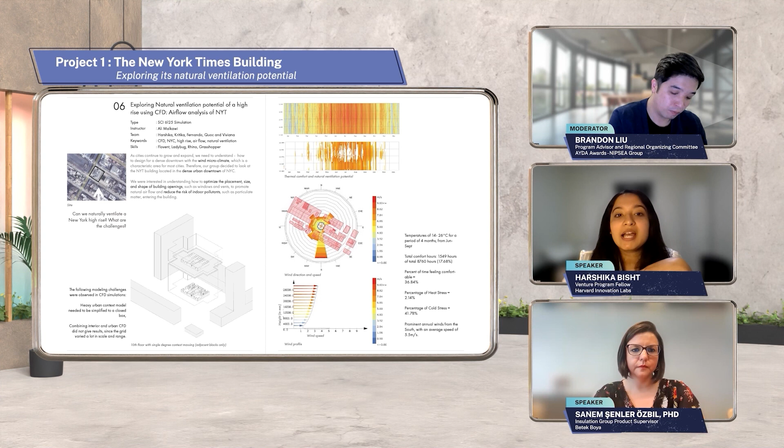Out of that analysis, we were able to iterate on a few options and test them. What you're seeing on screen is a graph that gives you an idea—all the blue places are cooler because they might have buildings or some obstruction blocking the wind. The reddish zones aren't hotter in general, but have more wind flowing through them. So you have a spectrum from blue to red showing the wind flow.

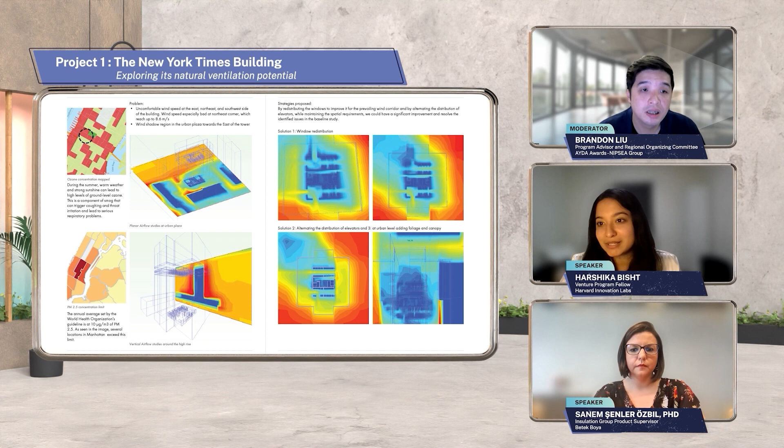In this case, we were able to redistribute our windows and some of our elevator shafts to enable better airflow inside that floor plate. These are some key analyses you can do using this kind of workflow. You could utilize these tools, or there are more tools out there—you can research online and see what fits best based on your previous knowledge.

This is another project I did where we're looking at a facade. I think one good thing about undergraduate studies is you get to innovate so much—you can create very interesting facades if you want to. And I'm sure in AYDA you've had some amazing projects with students. I wanted to focus on tensile facades particularly.

I was looking at this kind of innovative, all-encompassing fins that I could apply. This project was in Delhi during my undergraduate period, but then as a graduate working in climate-responsive design, I thought I might as well go back and analyze how consciously I designed—how my building performs. That's where I gave a second life to this project.

The tools used here are Climate Consultant and Climabox for this project. There's some Ladybug being used also on the side, and Climate Studio, but largely it's simple tools that give quick results. This is one of the psychrometric charts, which can get a little complex to understand—I know that.

Climate Consultant directly tells me the best strategies to move with, and that's what I required at that time. Since it's in Delhi, I clearly understand there are hotter days, so you need more cooling strategies there rather than heating strategies.

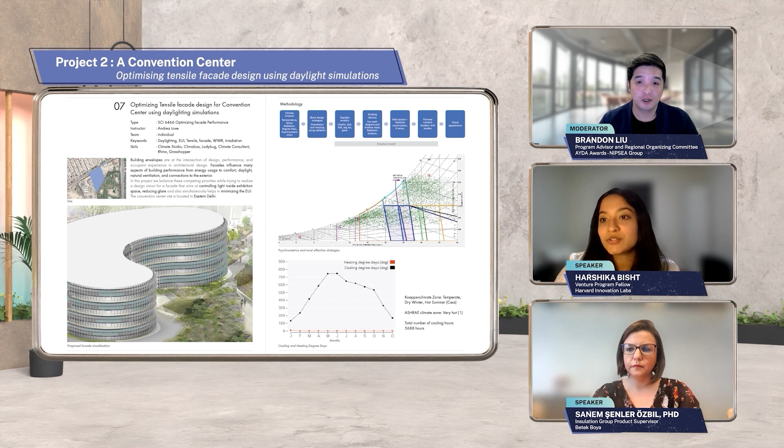That was the whole idea - I picked one block and tried to analyze it in different positions to see if I could reduce the use of material in my building. Even simply by orienting it differently, if there are shadows falling from nearby blocks, can I remove the need for facade details that block sunlight entirely? So this was one way of thinking consciously about reducing materials.

I was also trying to understand how much radiation is falling on the block, to understand how much sunlight is actually passing through. Earlier, as an undergrad, not knowing the best way to design, I had put in full glass windows and then put a tensile facade on it. But here I had the opportunity to redesign.

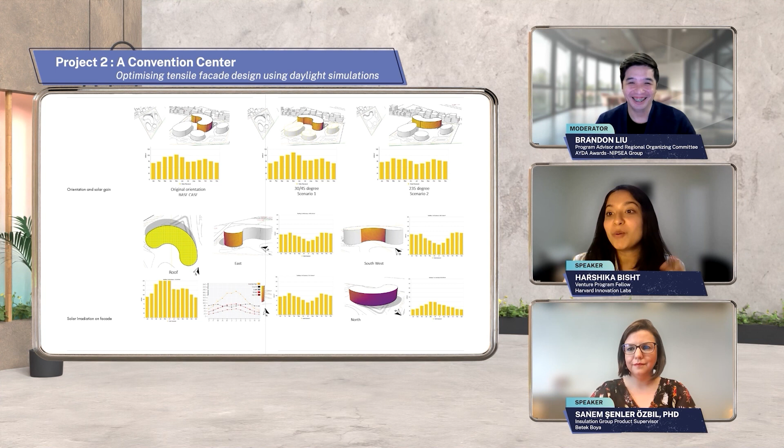So I reanalyzed what the wall-window ratio should be. Especially in our climate in Delhi, should I go for 55%, 60%, or 40%? I analyzed these different wall-window ratios to see what performs best on the basis of lighting, because one key issue here is that this is an exhibition hall - it needs to maintain natural light throughout, and it needs to be designed so the exhibit halls remain well lit, but also avoid glare.

So this is another climate studio analysis I'd done. As you can see, when you move from 60% to 40%, the green area reduces - that's the spatial daylight autonomy throughout the year.

That's a technical term, we'll give you some definition of it on the side. But it basically gives you an idea of how much sunlight there is throughout the year. As you can see, when the green reduces, that means the innermost region in the room doesn't have light throughout the year, in short.

We can still see on the yellow areas, this is the glare. So we reduced the glare at 40%, but we also lost some of the light. It's always a balance between the decisions you're making. You cannot go completely on one side where you're doing climate responsive design but not taking care of the occupants inside.

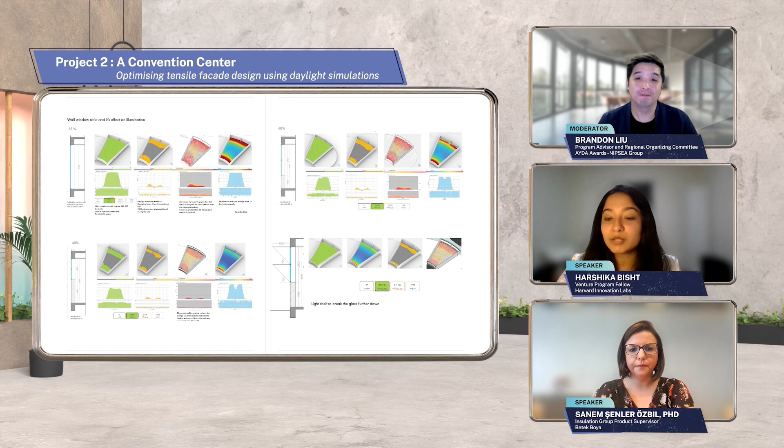And then we started looking at vertical systems versus all-encompassing systems. Now it's starting to look deeper into design. These were the two main designs I had for the tensile facade.

So I was thinking about doing vertical fins, or doing these full-on diamond-shaped tensile facades, which actually have some separation in between them so they can let the light in - more indirect light, which is obviously better for the people.

And then we do smaller analysis in terms of what it looks like inside - how much light do we have inside the room? If there's going to be really glary light at the bottom, like you can see in the pinkish zones, through the window you can see you're getting a lot of light in.

So again, between the two, we could see we're reducing glare more with the vertical fins - we're not reducing as much glare here. So that's why I went forward with the vertical fins.

Throughout the process, as you can see, you're making decisions based on the different alternatives you have. You're iterating on them, changing sizes and dimensions, and this is all like a designer's work - you can reduce consumption a lot by just designing consciously here.

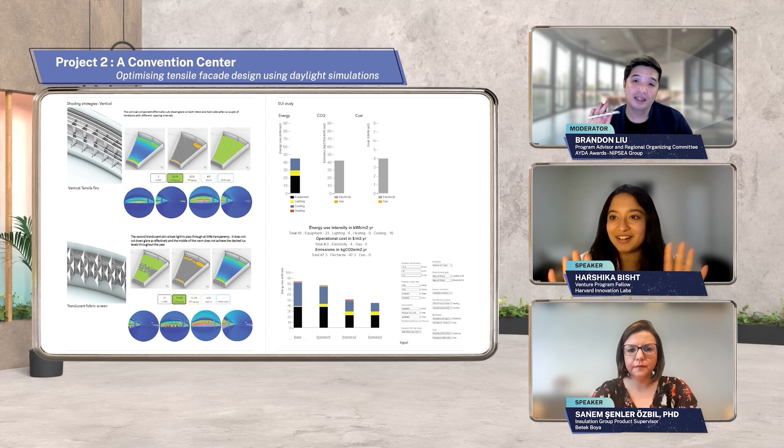I've done some analysis on the energy use intensity later on, but I think just to be wary of the time, I'm going to stop it here.

No, I think it's great. No, a few things I've caught. Maybe Sanem can add on as well.

So what I really like is you mentioned from a surface level all the way to in-depth, and then we can choose the kind of tools that's suitable for us at that point, whether we're a student or practicing. I think what you do reflects on the importance of what Sanem does too. If Harshika were to know more about what Sanem works on as an undergraduate, the outcome would be different, and at the graduate level it becomes even more exciting. This is how I see it as an observer.

Another thing I really like is the word you used, Harshika - consciousness. You're conscious that you want to bring a solution, and that's why it led to so many simulations, hypotheses and trials and errors, on how a slight change in the diamond-shaped tensils, or a full vertical surface, or the ratio of windows and walls. If more designers, even at undergraduate level, can start playing with these things, the outcome would be everyone reducing 1%, and that is great. Oh my God, I'm so excited.

Another word that came to me when I look at your work is that there's a spectrum - how we balance between climate and comfort. I think what you share gives me a very clear perspective of your work and how it can impact how designers work. And I could be wrong, but I think a lot of what you do is also about the relationship of the building with the environment.

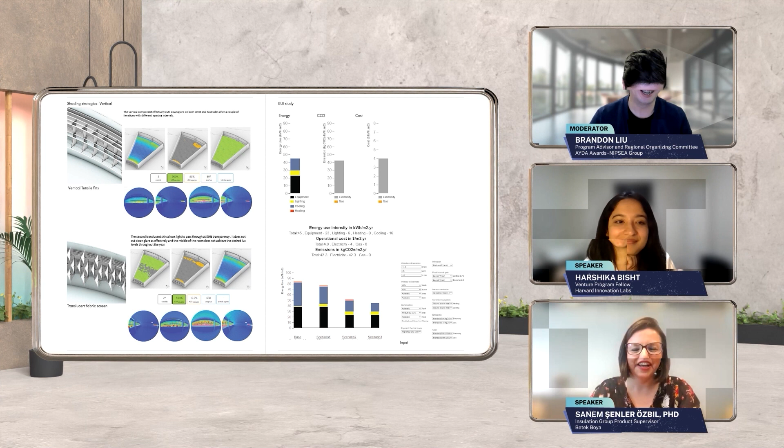Okay, let me first start with a brief introduction of my company, Betek. Betek was established in 1988 to work in the field of construction chemicals. Right now, Betek is the pioneer company in paints and ETICS sector in Turkey, with all these brands you see on the screen. We're actually in many business segments - we have many products in architectural coatings, both for home solutions and professional solutions, products for industrial coatings, products for wood coatings. We're a full producer of ETICS, and we also have auxiliary products classified as beyond coatings.

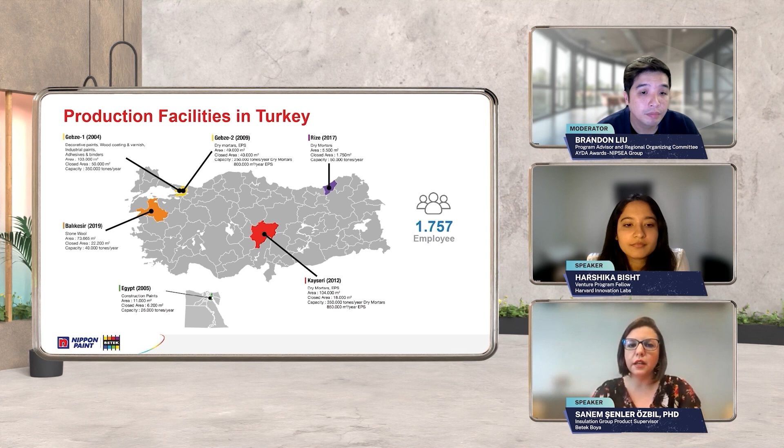We have 6 company production facilities in Turkey. We have Gebze 1 facility, where we produce mostly paint products. In Gebze 2 facility, we produce dry mortars and EPS, which is an insulation facility. We have a similar facility in Kayseri, producing again dry mortars and EPS. We're producing dry mortars in Rize, and our stone wool production is located in the city of Balıkesir. We also have a construction paint production in Egypt.

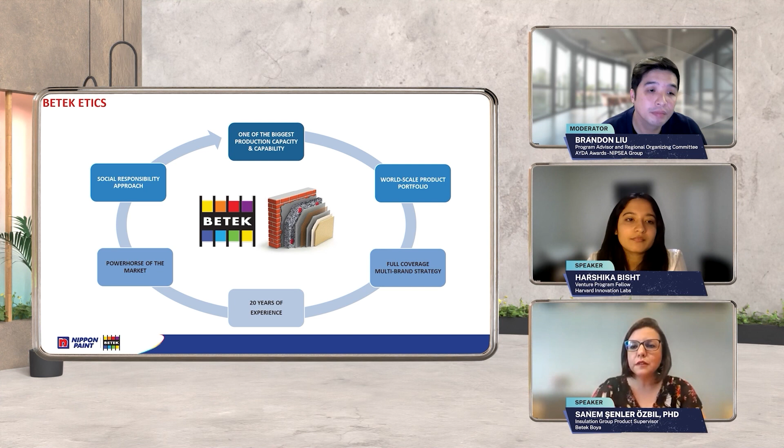In terms of ETICS, Betek has one of the biggest production capacity and capability. From this picture, you can see that ETICS consists of many products directly applied on top of each other, and we are producing most of these products. We have a world-scale product portfolio, full coverage multi-brand strategy, more than 20 years of experience for ETICS. We are the power horse of the market, and we take ETICS as a social responsibility. What does this approach result in? Those numbers. We take thermal insulation as a social responsibility, and we calculate all these numbers yearly and publish these results.

By the year 2023, in 20 years, with net sales of more than 235 million square meters, we could provide a comfortable life to 9.5 million people. As a result of energy savings, natural gas costing 65 billion Turkish liras is also saved. And from the environmental point of view, 28 million tons of carbon dioxide equivalent greenhouse gas emissions are prevented. This is equal to 21 times the annual carbon dioxide absorption of Bolu forest, one of the biggest forests in Turkey.

Energy and climate, let's start with these issues. As you know, the main actions and everything actually started with the Paris Climate Agreement. 195 countries agreed that we have to do something, since it's becoming late. After signing the agreement in 2016, the European Commission published many targets. The main target is to achieve a carbon neutral Europe by the year 2050.

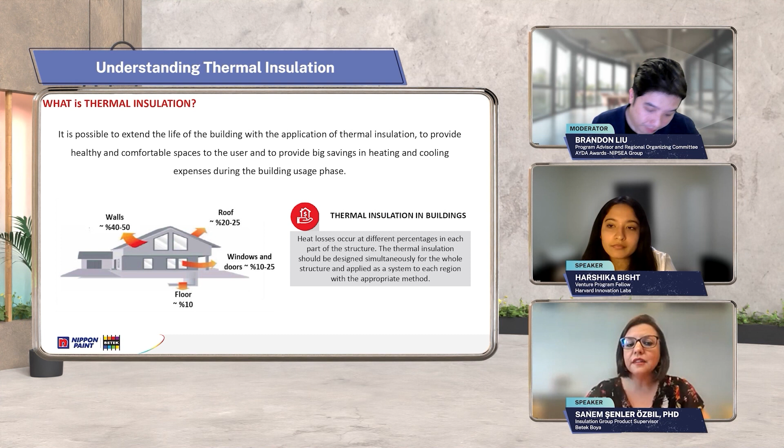So what is thermal insulation? Thermal insulation is an application applied outside of your building to prevent heat losses. You can see from this picture that heat losses occur at different percentages in each part of the structure. A building's facade is normally the largest surface area between its internal and external environment, where a great number of heat losses can occur. Thermal insulation of the external walls from the outside is an efficient way of protecting against thermal energy loss, and it provides healthy and comfortable spaces to the users.

First, we have an adhesive to glue the whole system to the facade. Then we have the thermal insulation board, either EPS or stone wool. We have anchors applied, and then the base coat is applied with a glass fiber mesh embedded inside it. Finally, the ETICS system is finished with the finishing coat. Exterior paint is not included in the ETICS system.

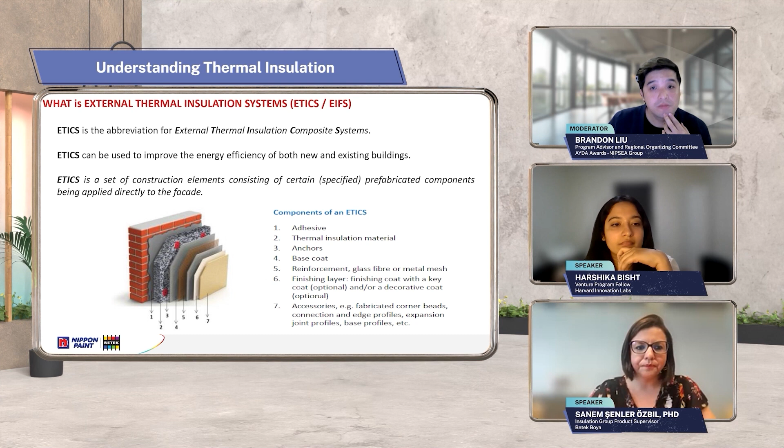The quality and durability of ETICS depend on the careful choice of the system components, and it is also important to choose system holders with their certification.

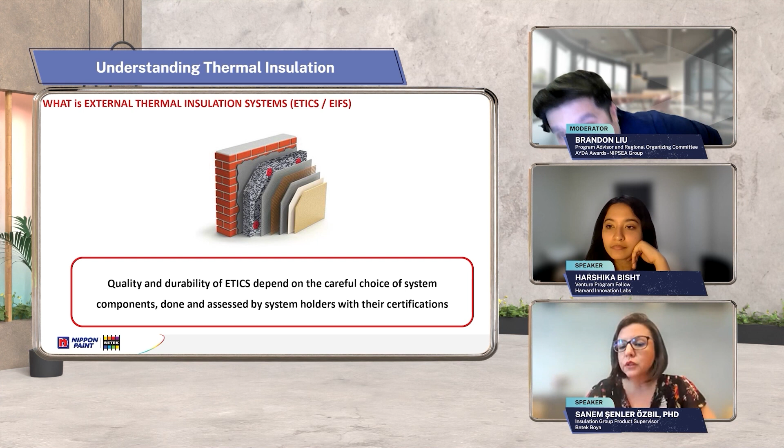We've just mentioned how efficient a way it is for energy savings. It's one of the best methods to prevent heat losses. ETICS creates healthy houses with thermal comfort. It improves the energy efficiency of an entire building. The application is relatively easy and doesn't require people to move out. Finally, an aesthetic upgrade, along with a renovation chance for the buildings, can be achieved with an ETICS application.

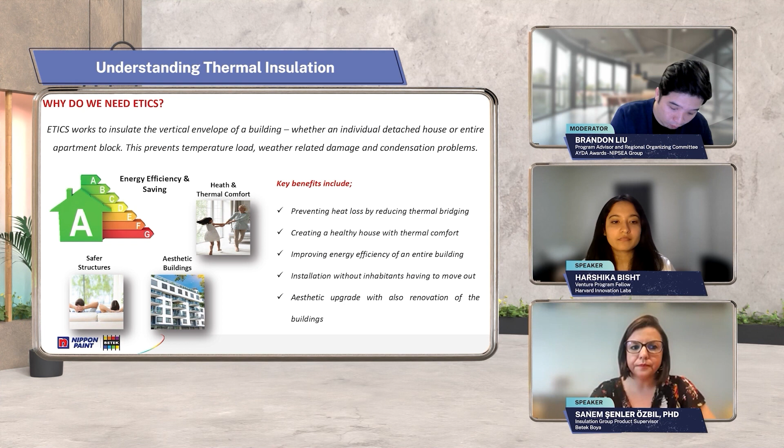The Double Carbon system has very innovative products. The properties of the adhesive, the EPS board, base coat, and finishing coat are all special products in themselves. As a system, it has, for example, 5 times higher impact resistance. The stone wool system includes specially designed products for stone wool boards.

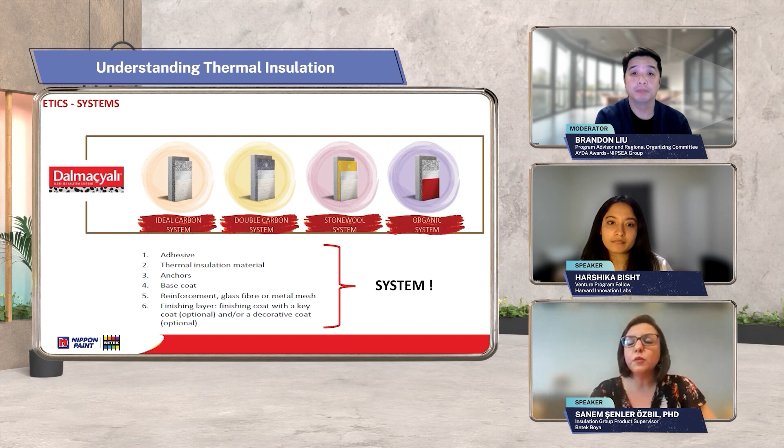The products of organic system are another segment, because all the other systems are cement-based, but this system includes organic products which are ready to use, with very high durability and very easy application. I want to show you these systems just to give an idea of the properties of an ETICS system.

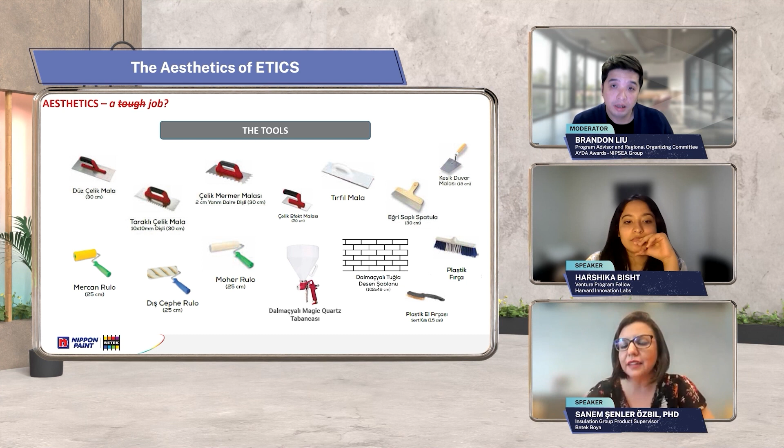The cost of energy is increasing day by day all over the world, and it's not very easy to show the benefits of ETICS immediately. So we have high potential, very low awareness, and hard convincing. So in order to create demand, we have many projects in the field.

The Thermal Camera Roadshow has a very big budget, a very big effort covering all of Turkey. With this project, our colleagues visit buildings one by one, taking thermal camera shots and showing residents how they are losing their energy. In this project, more than 50,000 buildings have been visited during 3 years, and we have a huge potential with legally authorized info in our system.